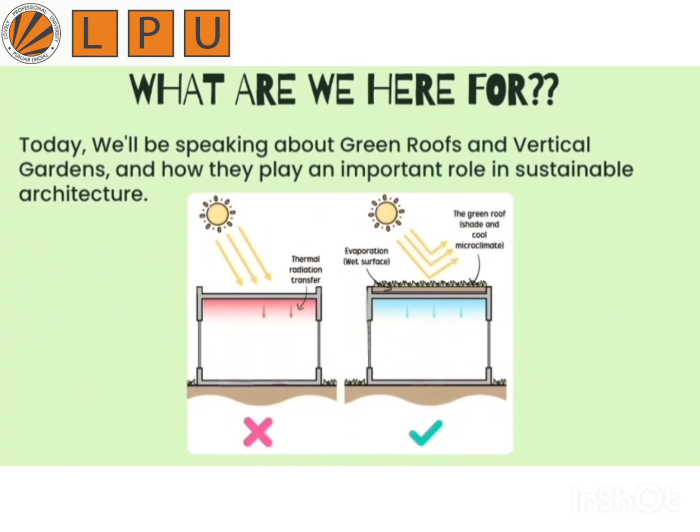Green Roof and Vertical Garden. I, Alisha Mirza, Tushar Thaman and Aditya Chauhan from Lovely School of Architecture and Design. What are we here for? Today, we'll be speaking about green roofs and vertical gardens and how they play an important role in sustainable architecture.

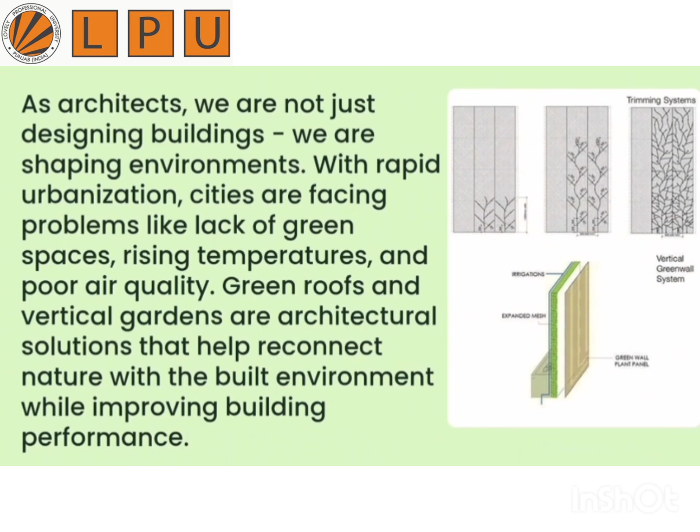As architects, we are not just designing buildings, we are shaping environments. With rapid urbanization, cities are facing problems like lack of green spaces, rising temperatures, and poor air quality. Green roofs and vertical gardens are architectural solutions that help reconnect nature with the built environment while improving building performance.

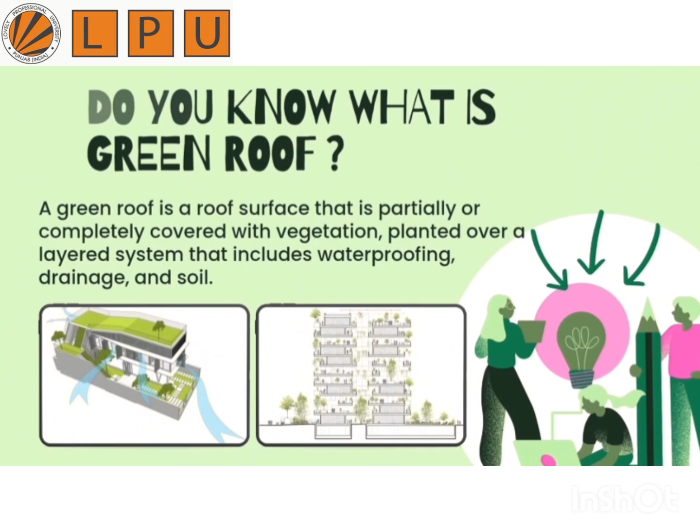What is a green roof? A green roof is a roof surface that is partially or completely covered with vegetation, planted over a layered system that includes waterproofing, drainage, and soil. There are two main types of green roofs. The first is an extensive green roof, which has a shallow soil layer, lightweight plants, and requires low maintenance. These are commonly used in residential and commercial buildings.

The second is an intensive green roof, which has deeper soil, supports shrubs and even trees, and can be used as a garden or recreational space. These roofs require higher structural strength and maintenance.

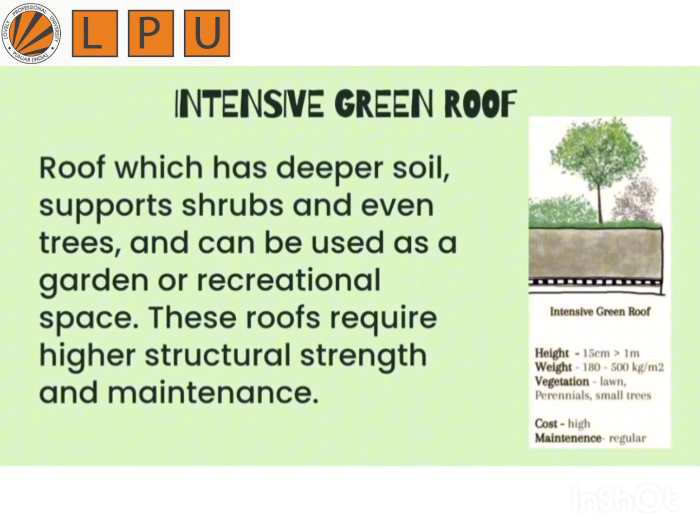What is a vertical garden? A vertical garden, also known as a green wall, is a system where plants grow on vertical surfaces such as building facades or interior walls. Vertical gardens can be designed using climbing plants, modular panels, or hydroponic systems.

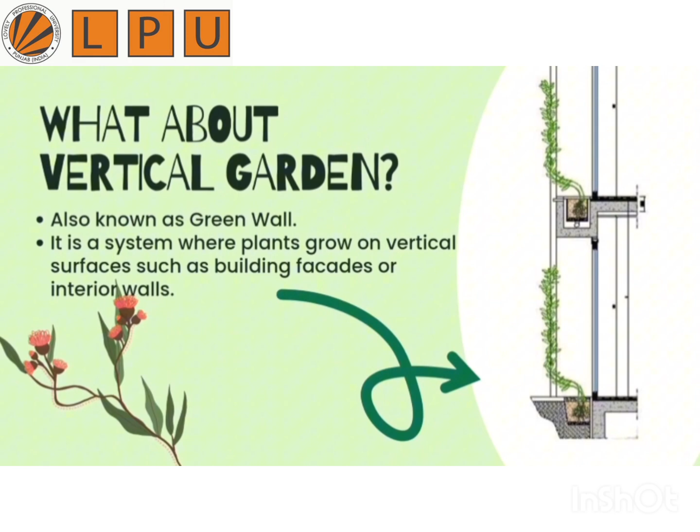In architecture, they help transform blank walls into living surfaces, improving aesthetics, insulation, and environmental quality. They are especially useful in dense urban areas where horizontal green space is limited.

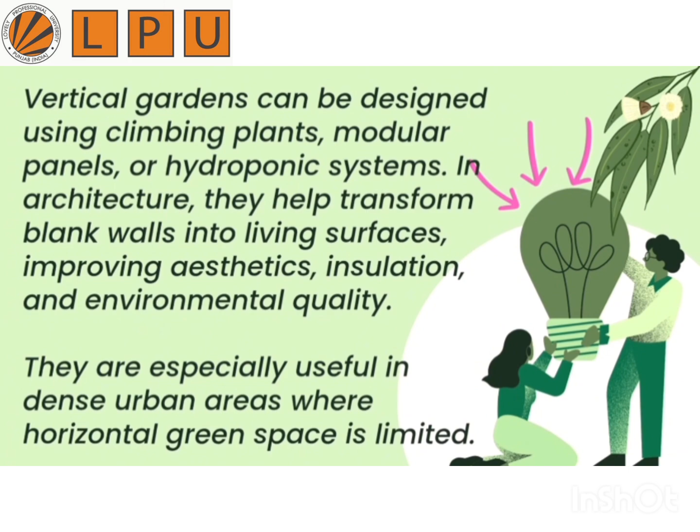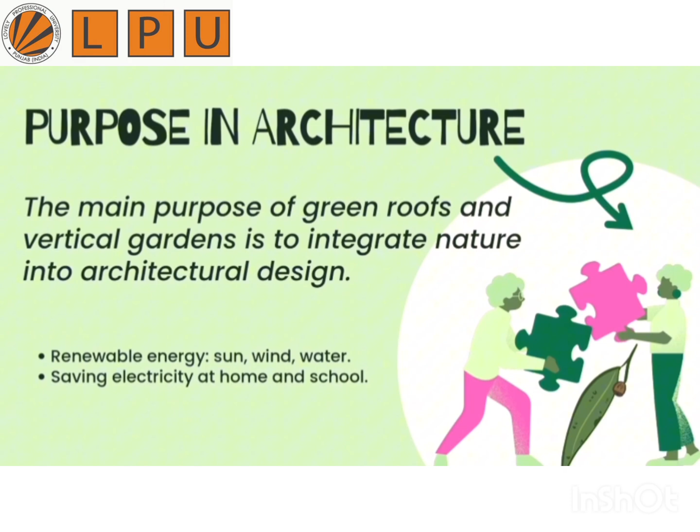Purpose in architecture. The main purpose of green roofs and vertical gardens is to integrate nature into architectural design. From an architectural point of view, they help improve thermal comfort, enhance passive cooling, reduce energy consumption, improve the building envelope, and promote biophilic design. They also help create visually appealing and sustainable structures that respond to climate and environmental needs.

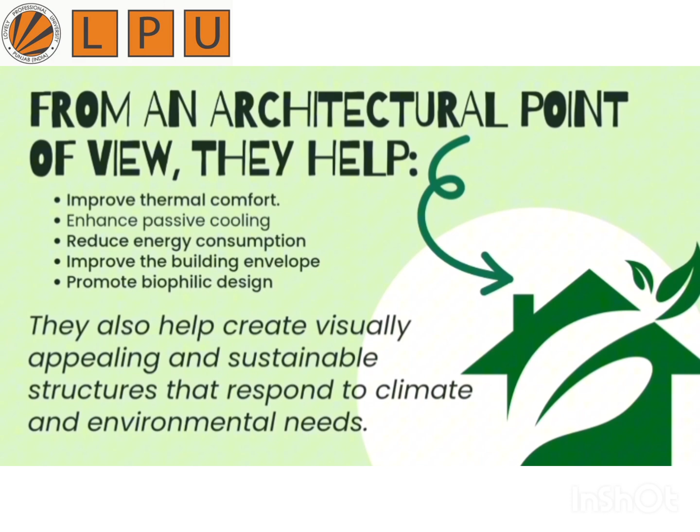Advantages. Green roofs and vertical gardens offer many advantages. Environmentally, they reduce the urban heat island effect, improve air quality, and manage rainwater runoff. Architecturally, they act as thermal insulation, reduce noise pollution, and protect the roof membrane, increasing its lifespan.

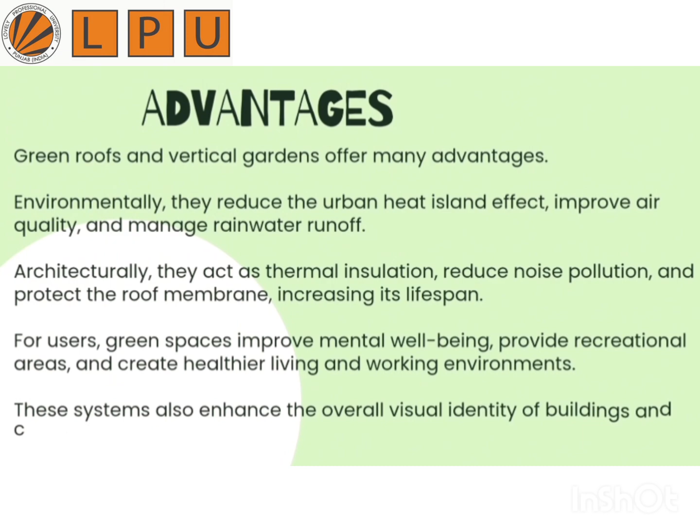For users, green spaces improve mental well-being, provide recreational areas, and create healthier living and working environments. These systems also enhance the overall visual identity of buildings and cities.

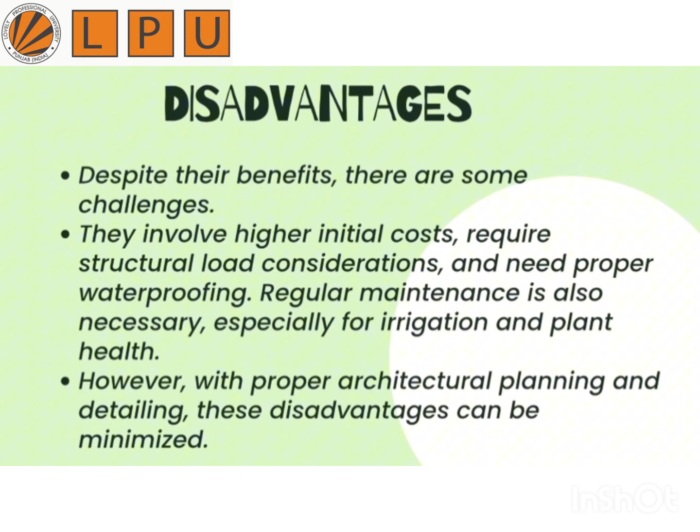Disadvantages. Despite their benefits, there are some challenges. They involve higher initial costs, require structural load considerations, and need proper waterproofing. Regular maintenance is also necessary, especially for irrigation and plant health. However, with proper architectural planning and detailing, these disadvantages can be minimized.

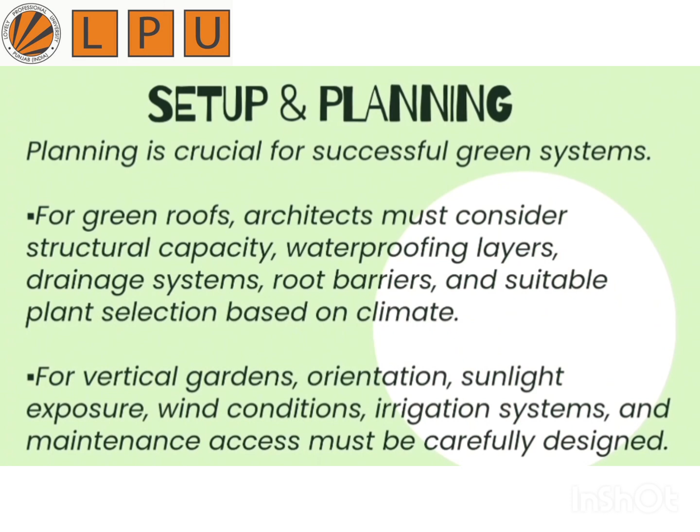Setup and planning. Planning is crucial for successful green systems. For green roofs, architects must consider structural capacity, waterproofing layers, drainage systems, root barriers, and suitable plant selection based on climate. For vertical gardens, orientation, sunlight exposure, wind conditions, irrigation systems, and maintenance access must be carefully designed. Using native plants is always preferred for sustainability.

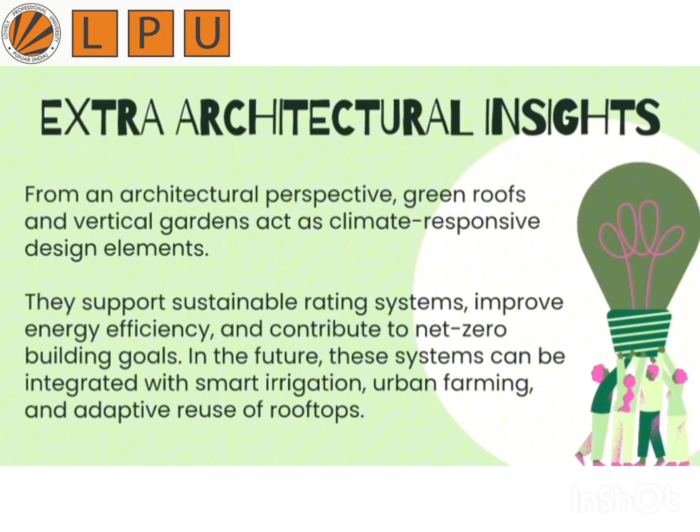Extra architectural insights. From an architectural perspective, green roofs and vertical gardens act as climate-responsive design elements. They support sustainable rating systems, improve energy efficiency, and contribute to net zero building goals. In the future, these systems can be integrated with smart irrigation, urban farming, and adaptive reuse of rooftops.

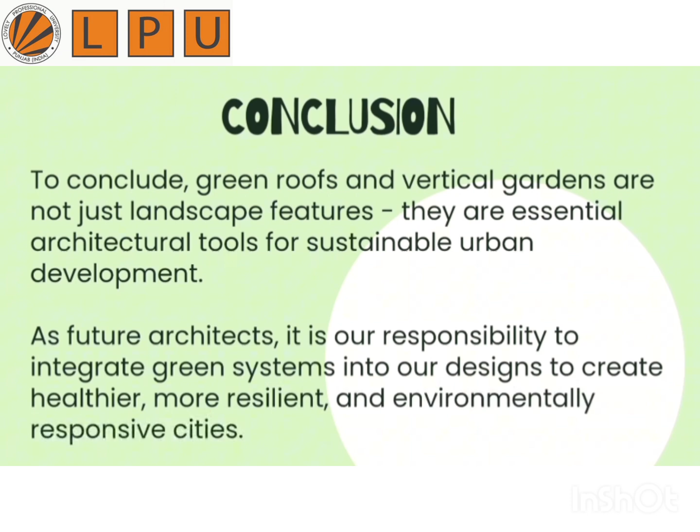Conclusion. To conclude, green roofs and vertical gardens are not just landscape features, they are essential architectural tools for sustainable urban development. As future architects, it is our responsibility to integrate green systems into our designs to create healthier, more resilient, and environmentally responsive cities.